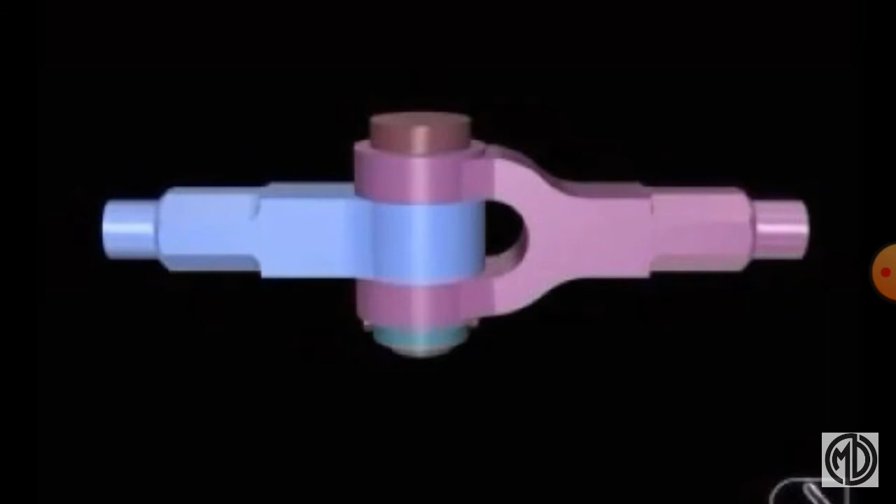This knuckle joint is widely used in almost all mechanical and automobile engineering. Automobiles like car, bus, lorry, wherever a heavy transport system is there, we are going to use this knuckle joint. So watch this video, which is very useful for upcoming engineers who want to grow in the automobile sector, because in the automobile sector the key portion is the transmission system. It is one type of joint. Apart from it, a number of joints are there; in this session we will learn how to join the knuckle joint.

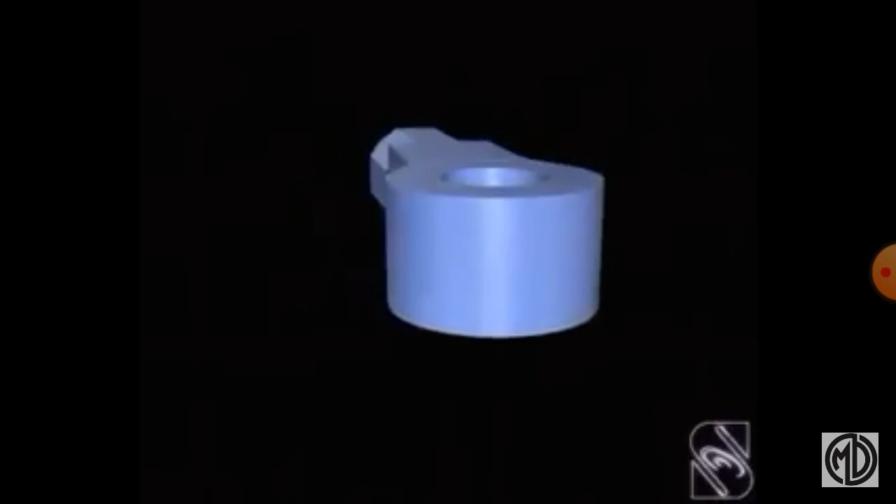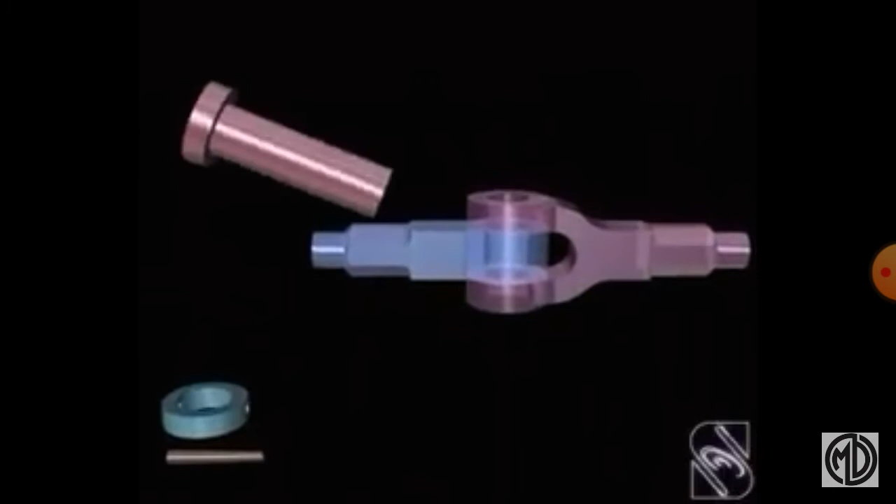So this is the eye shaped one, and before that we have seen the tuning fork type. So these two are going to be assembled like this. Then we are going to get one pin. It contains a hole at the bottom. At the top we have a collar so that it cannot fall when it is inserted between the tuning fork and the eye. You have seen how the pin is going to be assembled.

Next, we are going to have this assembling session here. The pin is there and we have one round shape. It is like a washer. It contains a hole. That hole is used when we are locking that pin with a rod. So this rod we are going to fix.

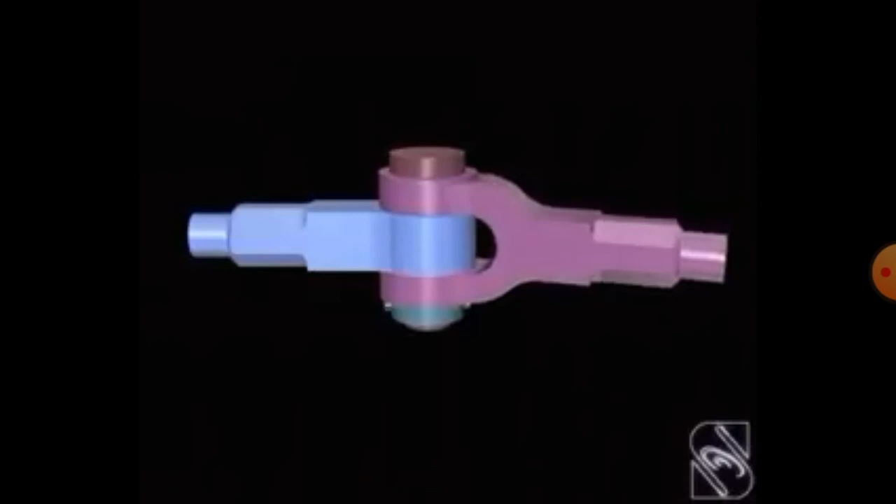Thereby the pin is assembled with the two parts of the knuckle joint system so that it will be fixed in that position. At the opposite ends, one is input, the other one is output. I think you can see how the rod is going to perform its operation.